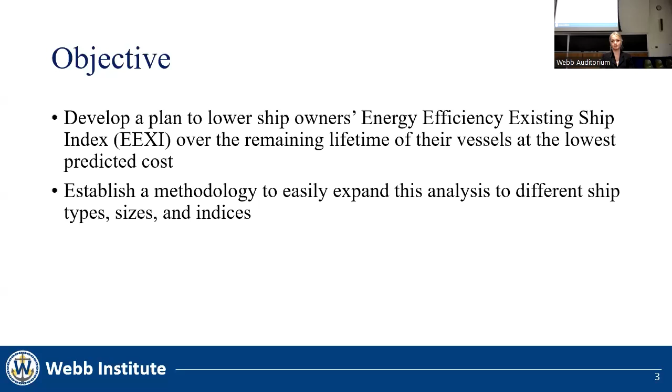A quick outline of my presentation today. I will go through the background of environmental regulations and methods of compliance, the importance of the post-Panamax container ship class in this analysis, then move on to the numerical analysis methodology, which was foundational in creating my tool, and the resulting conclusions I was able to pull out of my tool. I will conclude with recommendations for future work.

There are several preliminary regulatory documents publicized across the globe concerning maritime greenhouse gas emissions. These approaches fall into three categories: design, operational, and fuel. Design indices are based on technical documents showing that a ship is built to a high enough standard. Operational indices combine design indices with the actual operational qualities of a vessel. The CII regulations fall under this category. Fuel indices purely consider the quality and quantity of fuel being burned.

These are less common. My thesis focuses on a design index, specifically the Energy Efficiency Existing Ship Index, or EEXI. It is closely tied to another set of regulations called the Energy Efficiency Design Index. However, this is directed towards new builds.

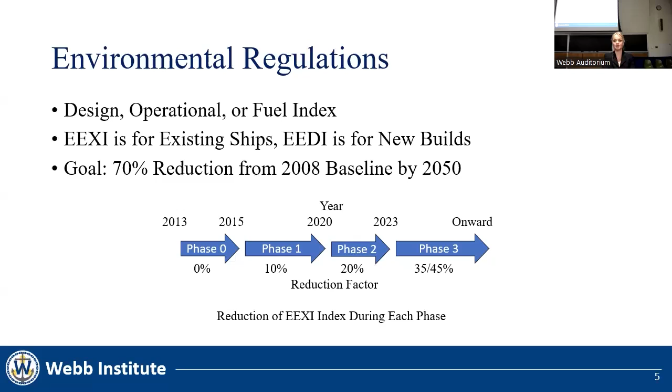The ultimate goal of these standards is to reduce global greenhouse gas emissions across the entire fleet. A target of 70% reduction by 2050 from a 2008 baseline was announced in combination with the EEXI/EEDI resolutions by IMO. For existing vessels grandfathered in to these regulatory frameworks, this is completed through phases where the emissions requirements progressively tighten. As of now, we just entered phase 3, or the current regulatory threshold.

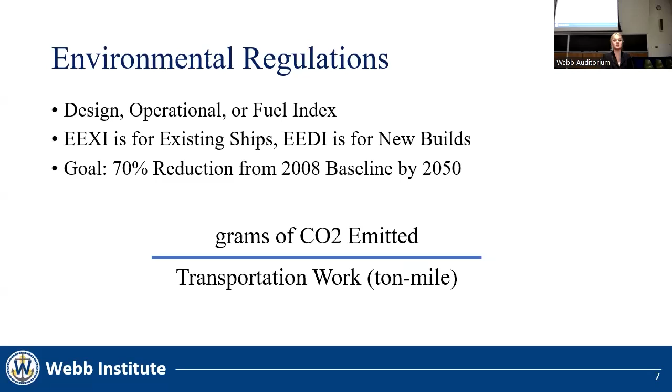This is the governing equation for these regulations, which basically boils down to grams of CO2 emitted over the transportation work in ton-miles. There are several conversion factors in the prior equation to modify the index value to be applicable across all ship types.

When looking at the background of green technology, in general, it can be divided into 5 categories: digitalization, hydrodynamics, energy, machinery, and aftertreatment. Digitalization encapsulates speed reduction, alternative routes, and changes to the existing vessel's operation. These are not long-term solutions, as ships would not operate at full capacity, which would greatly impact the economics of shipping. However, speed reduction can be looked at as a short-term method to meet EEXI regulations and keep a vessel in service.

Hydrodynamic solutions include hull coatings, hull form optimization, air lubrication, and cleaning. As I am working with the design index, quantifiable efficiency modifications are necessary to be presented in the technical document. So this category falls out of the scope of this index. Energy is the biggest focus of this index. The main goal is to push towards the future of fuel, so these regulations were formed around this idea.

The objective of machinery alterations for environmental regulations is to increase the efficiency of a system, reducing the emissions by burning less fuel. While waste heat recovery is an effective measure to improve efficiency, it is not supported in the regulatory document. Other methods, such as battery hybridization, show little potential given the long voyage lengths of post-Panamax container ships.

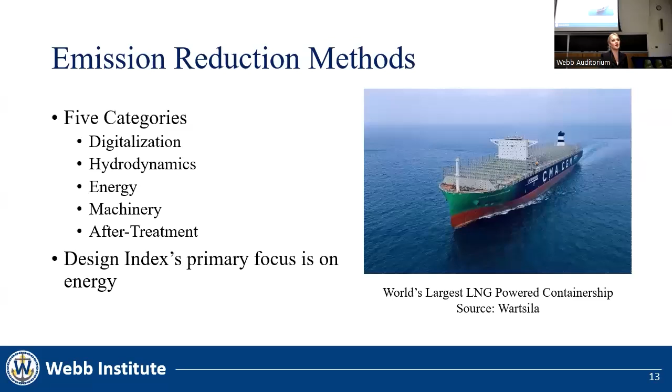This analysis circles around the post-Panamax container ship class. This class was selected because they are standardized vessels with widely publicized operational and design data that were necessary in the verification and validation of the tool. They also commonly fall on the borderline of compliance, making small alterations very valuable.

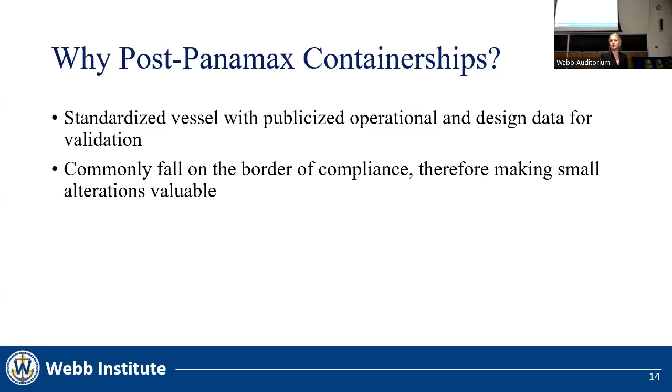A quick outline of the methodology of my tool. Inputs are collected on the ship in question. The inputs are checked to make sure that they fit within the post-Panamax container ship. Then calculation pathways are selected based on the technology on board. Results are provided to the ship owner and recommendations for fueling are made.

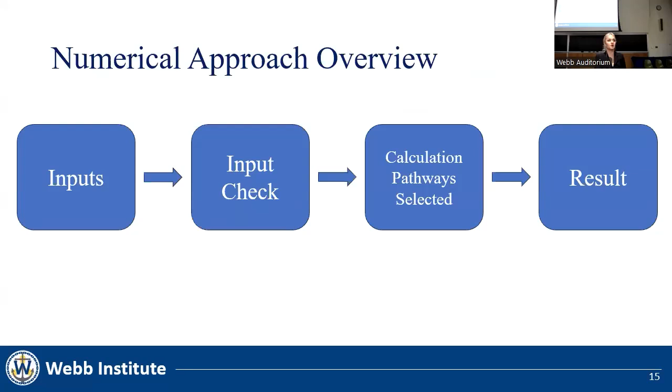The data collection and inputs necessary are principal particulars, main and auxiliary engine data, additional technology, structural enhancements, and emergency backup fuel. The principal particulars include the length, beam, draft, and design displacement. The collection gets a little bit more complicated when collecting for the main engine. The figure to the right depicts the methodology and data collection for the main engine.

For ships that are utilizing short-term slow steaming, the limited maximum continuous rating, or the MCR, should be input in the second row. The tool will then default to using the limited MCR, even if an unlimited value is present. The top section should be filled out for the primary fuel, regardless of whether a ship is dual or singular fueled. If only one fuel is present, the last few rows can be left blank.

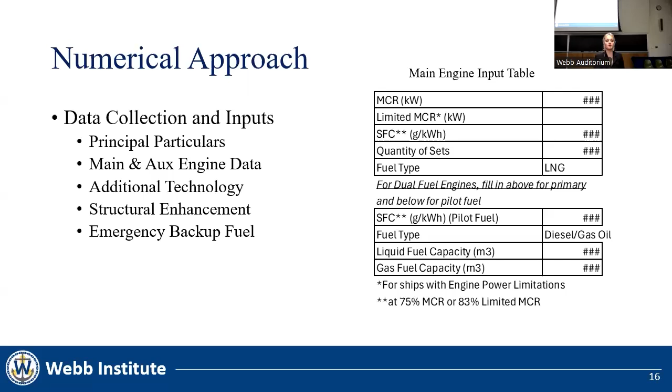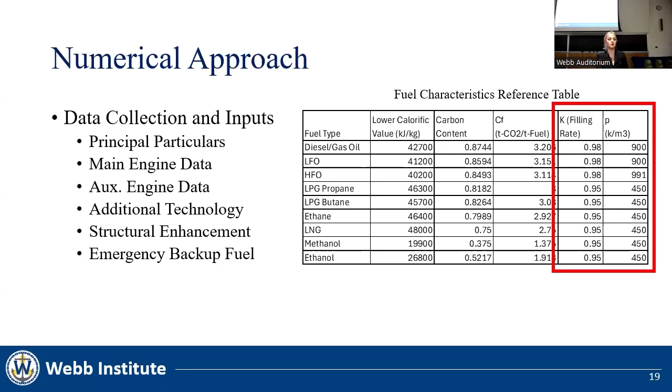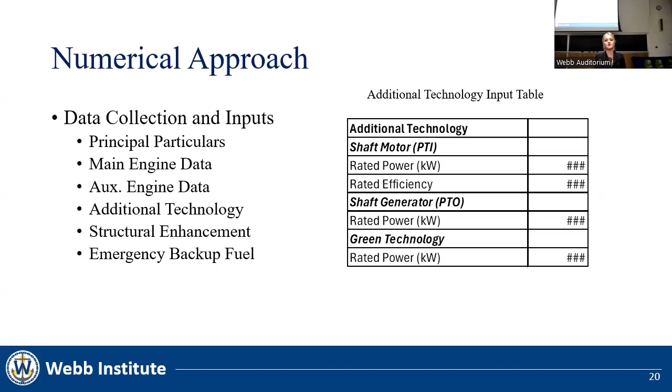The filling rate and density can be altered as more information is known about the specific fuel being used and the systems on board. There is an option to alter the index value in the presence of shaft motors, commonly called power take-in systems, shaft generators or power takeoff systems, or the presence of other green technology such as solar panels. These calculations turn on if a non-zero positive value is present. If not, the calculation pathway is shut off.

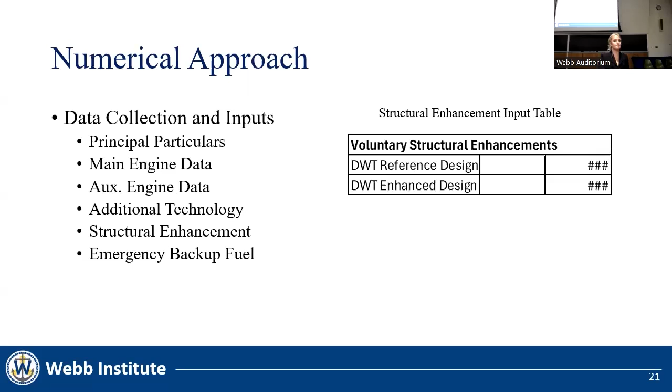The IMO also allows reduction in EEXI for ships with enhanced structure. This is taken as a percent over the design deadweight for the last certified inclining lightship before alterations were made. Due to volumetric capacity being necessary in deriving the final index capacity, emergency backup fuel is a necessary component. This is not present in all ships, but especially those running dual fuel tend to carry a more traditional fuel as backup given the experimental technology present on board.

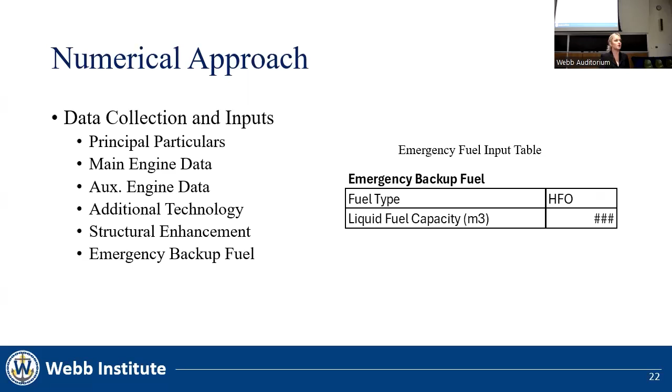These inputs correlate to calculations behind the scenes. The first step is validating the principal parameters. The assumptions made are only valid for this class of ship. This ensures that the output aligns with the expected IMO value. The fuel calculation track then chooses a calculation based first on if it's dual fueled or singular. It then decides whether gas can be considered a primary fuel and will derive the liquid gas weighted average coefficient if necessary.

The new propulsive powering value is created from the alteration coefficient utilizing fuel used and backup fuel if necessary. This translates into an adjustment based on the presence of slow steaming, shaft generation, shaft motors, auxiliary engines, reference design speed alterations, and a calculated assumed capacity of the vessel. The last major component before arriving at an EEXI value for any vessel in this class is allowing coefficient correlation factors to readily change.

A major simplifying assumption was made that no post-Panamax container ship was ice-classed or had ice-breaking capabilities. Beyond that, these coefficients are readily changed with the presence of energy efficient or green technology, regulatory limiters on capacity, or other specific design elements.

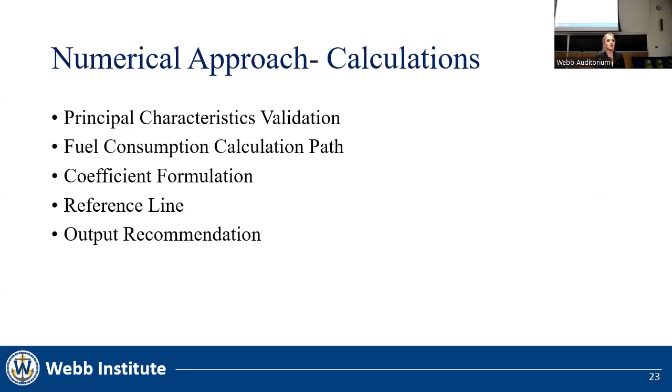The output results in a large data matrix in comparison to the attained EEXI reference. From there, a cost feasibility analysis selects the current optimal value, producing recommendations. Graphs are actively generated based on the weighted values.

The cost analysis was created on the basis of reduction capability of the fuel and the viability of the fuel in marine commercial use. The emission reduction potential is derived from the difference in lower heating value from an HFO baseline. The cost of fuel is encapsulated by the initial cost, CapEx, and the operational cost, OpEx.

The initial cost is based on research data, as most of these fuels do not have commercially ready engines available. The operational cost was assumed to be primarily fuel cost. The viability is established by rating the maturity and infrastructure availability for these fuels. The future fuel will be the one first to market with the lowest alterations needed to ports. This combines to create weighted values to produce recommendations.

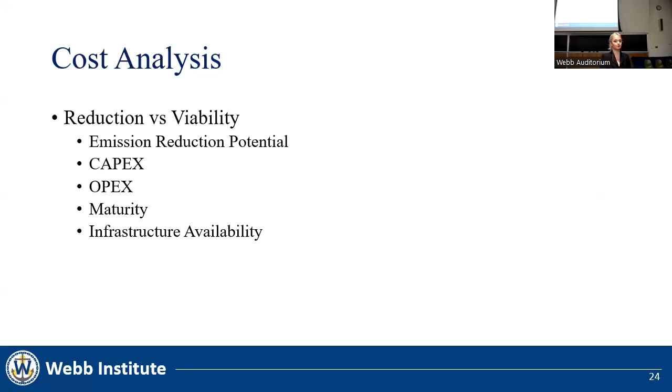The results are populated with a ship's attained, required, and recommended EEXI value. The attained value refers to what a ship is currently operating at. The required is the maximum value a ship can have and maintain compliance. The recommended value is what the same ship would have if it ran the recommended alternative fuel.

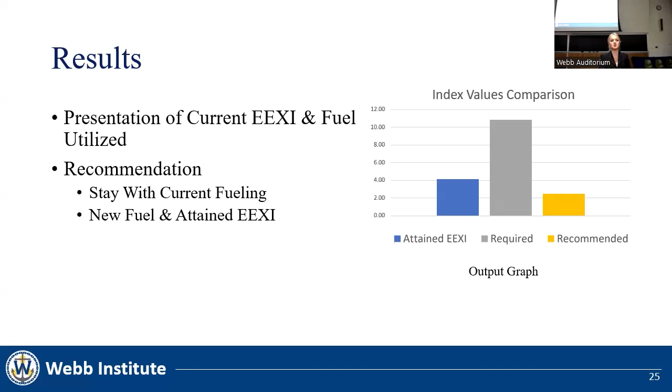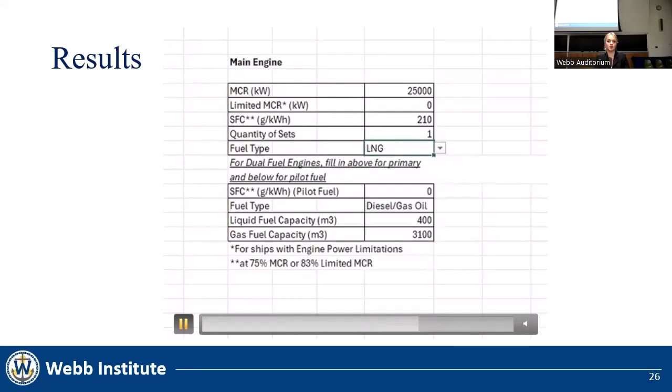The second input represents if the same ship is running LNG with diesel gas oil as a pilot fuel. The attained value is less than the required, meaning under these conditions, the vessel is compliant. Therefore, no alterations are created, and it is recommended to stay with the current fueling.

In conclusion, a tool was developed to recommend cost-effective ways to lower a ship owner's EEXI rating over the remaining lifetime of their vessel. The methodology has been made to be easily expanded to different ship types, sizes, and to include the CII index. It also was prepared to adapt to changes in the industry as more green technology comes about.

While the cost analysis has not been fully completed at this point, the preliminary data has indicated LNG is the current most promising fuel for existing ships under this analysis. This can be attributed to the high maturity, as it's already being used in commercial marine industries. Additionally, several ports already have infrastructure in place.

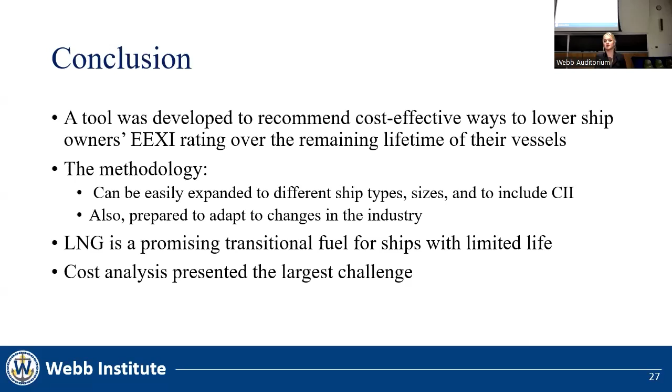For current ships under EEXI ratings, the fuel sought after does not have to be the final future fuel. This regulatory framework is set to reduce carbon emissions as the industry phases out older ships in the fleet. Also, in this analysis, the cost analysis quickly became the most challenging aspect. Data on cost is not readily available, especially on technologies that have not been invented yet. This was approached by making all cost data flexible so the tool can be readily adapted to technological developments.

The most direct recommendation for future work is the expansion to other ship types or to the CII index. Also, an analysis on the design and operational indices on reducing global greenhouse gas emissions could be utilized. This would be a continuation of both my thesis and Bishop's from Webb's 2012 class.